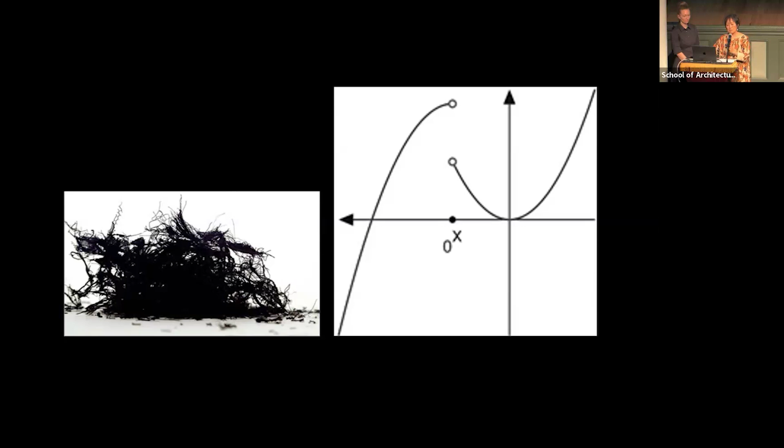I think one of the things I realized over time was that life can be very complex, and one of the great skills is learning not to go in a straight line. The idea of tangents and accepting a condition, in many ways I think is particularly true to the lives of women - that they're not straight lines, not a single focus that ends in a perfect circle, but instead a kind of exploded material from that circle. You learn not by accepting the complexities, but by learning how to flow around them, flow with them. And I think that's a great strength we bring as women to the practice.

I want to start by saying I'm very happy to be here, standing next to Billie, who I've worked for and with for the last 8 years, and very happy to be speaking with you. So thank you.

This is me as a child. I grew up in a place called Grayslake, Illinois, about 45 minutes north of Chicago, and that proximity would be really formative. It's where my love of architecture started. For me, it was the glittering beauty of the city at night, and more specifically, the idea of living in an apartment, which was the height of glamour.

From a young age, I would cut floor plans out of the Chicago Tribune of condos, and I would draw my own. They were always 3 bedrooms - one for me, one for my brother, one for my parents. And they took up the entire rectangle of the piece of paper because it was completely interior. I was only thinking about looking out through the windows at the beautiful city.

The other exciting thing about cities for me was the idea that so many different lives could be collapsed on top of each other, but also separate. You could have your own little world, but you could see and have access to other worlds.

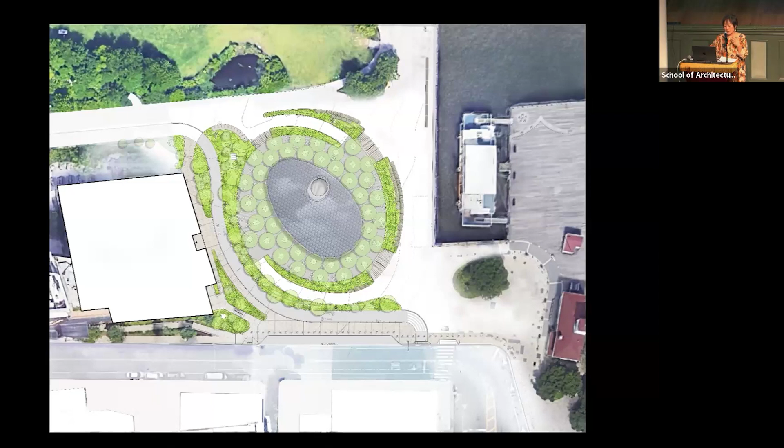And then Michael planted—this is his drawing—ginkgo and honey locust trees all around it, so the coloration around the trees right now, and in the fall, will all be golden. So you can see it's a very, very simple plan.

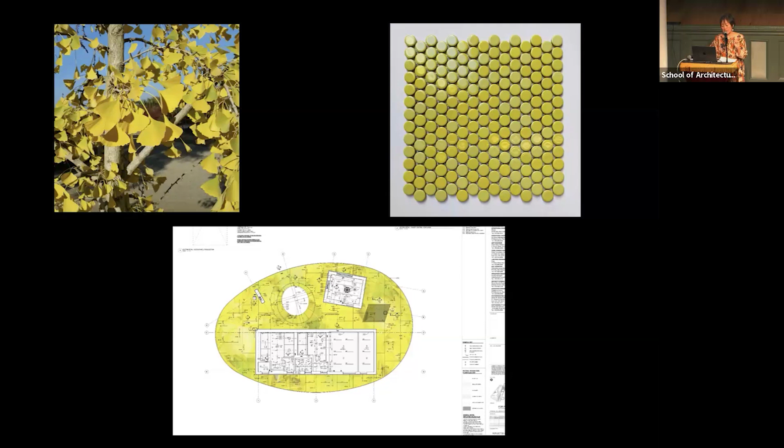It's three pieces: there's the concession stand, the bathrooms, and then a column, because holding it up is a very large canopy. We took the canopy color from the ginkgo trees surrounding the pavilion, and are using these small penny tiles of slightly varied colors of yellow for tiling the underside.

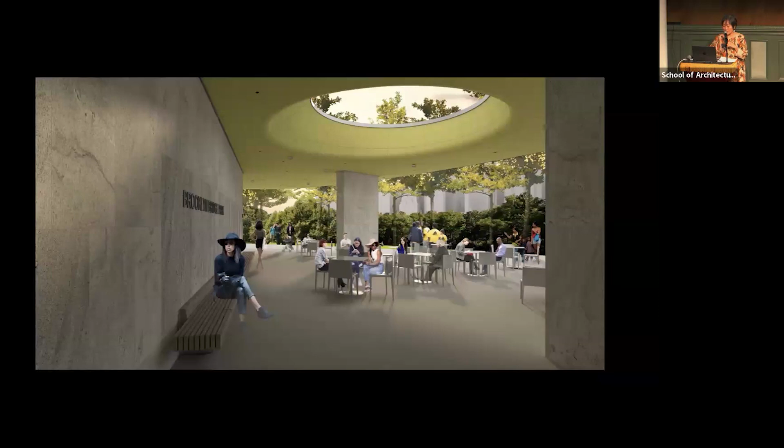This should be done, I think, in about another two or three months. And this is the office out for a trip to look at the framing and the beginning of the tiling of the underside of the canopy.

This was a project finished at the New York Philharmonic Lincoln Center, and we were involved with doing all of the public spaces. So all of the lobbies, all the places where people went became the spaces where we did our work.

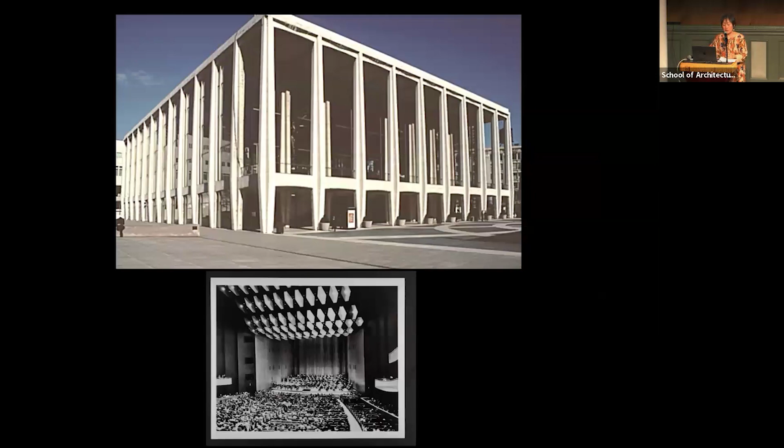That sense of a unidimensional material, unidimensional culture created spaces that in our own lives today felt very cold and unwelcoming. So it was our task to try to make these places feel as if they could be places where more different kinds of people could feel welcome. But there is a very strong sense of formality in Lincoln Center, and it was very hard to subvert that sense of formality. But the new leadership felt it was very important.

This was in the summer of 2021. An artist named Mimi Lien did this piece where she took AstroTurf and created a whole new topography out of the courtyard of Lincoln Center. So it was with this kind of spirit that we were asked to reimagine what Lincoln Center might be.

The idea of glamour rather than the sense of sobriety, which I think the earlier Lincoln Center exuded, was very, very important.

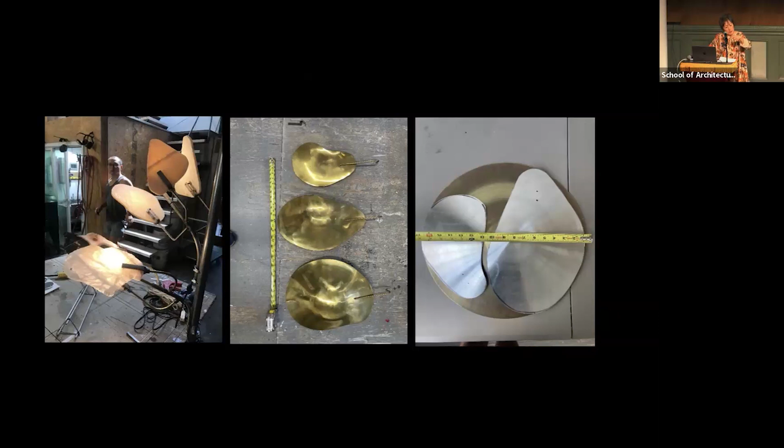They tried a number of different techniques. They tried alabaster, but it was too heavy and too fragile. Then they tried hammered brass, but it was too expensive and too heavy. So finally they ended up going to a company that makes musical cymbals, using spun metal that's much lighter. By cutting irregular shapes from the actual cymbals, they were able to make these folded, softly curved planes that became the petals reflecting the light.

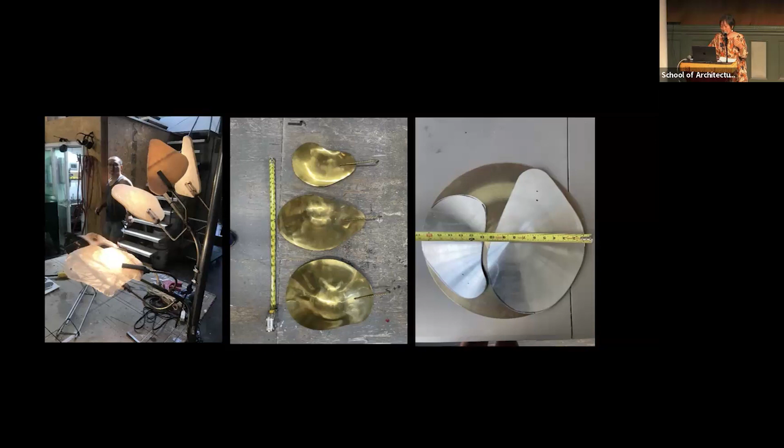Walking through the doors into the performance space, we also designed all of the fabric. It's in four different scales of petals, large to quite small, with a dark blue background. They replicate the idea of falling petals, so they're the most red and full of petals in the back, and as they move towards the front of the stage, they become bluer.

This is the next to last project before Jennifer takes over with the Obama Center. It's under construction in Mexico City. I think it will be done in a year, but we're not exactly sure — I'd say 2025.

Mexico City is an incredible city, very large, very spread over, and it feels almost impenetrable. But if you look at an aerial view, you see it's punctuated by interior courtyards. So one of the things we wanted to do with our project was make it feel connected to the architecture and culture of Mexico and Mexico City.

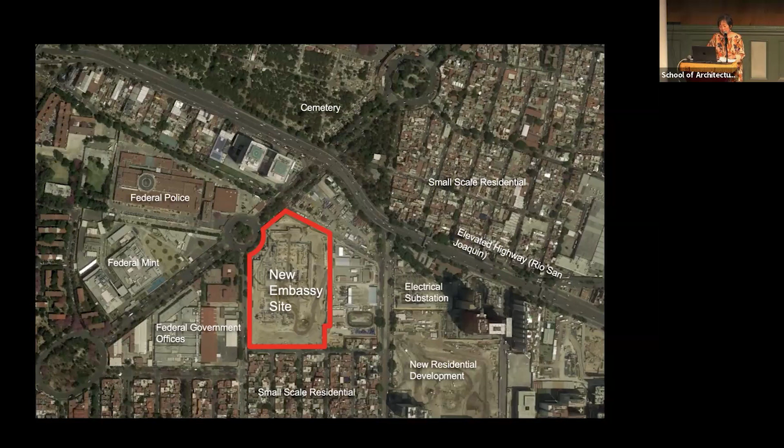Our site was in an area called Nuevo Polanco. It's an area that's growing, with a number of museums nearby, including one by David Chipperfield very close by. It's an irregularly shaped site, and the building is very, very large.

Mexico is the second largest trading partner of the United States, so it's one of the busiest embassies in the world. It's one million square feet, so it was really huge.

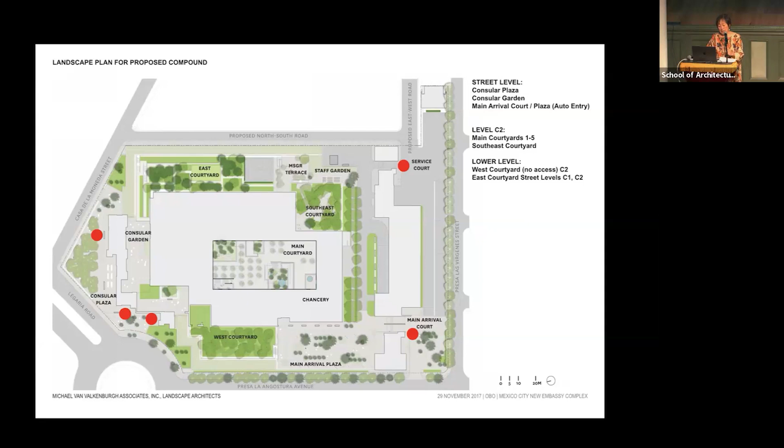But it is surrounded by a very intense landscape and a series of courtyards. The courtyard you first see in red is the primary courtyard, at a piano nobile, an upper level. Then there are a series of courtyards within that courtyard, and more at grade. So it's a very punctuated building.

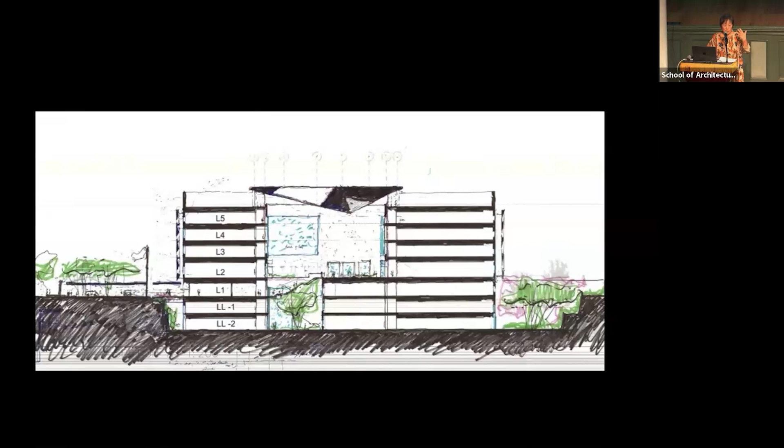Because the sun is so high in Mexico City and so intense, the main courtyard also has a sculpted roof over it, which brings in light and allows rain to come in, since there are plants underneath. We did a number of studies looking at how light would come in.

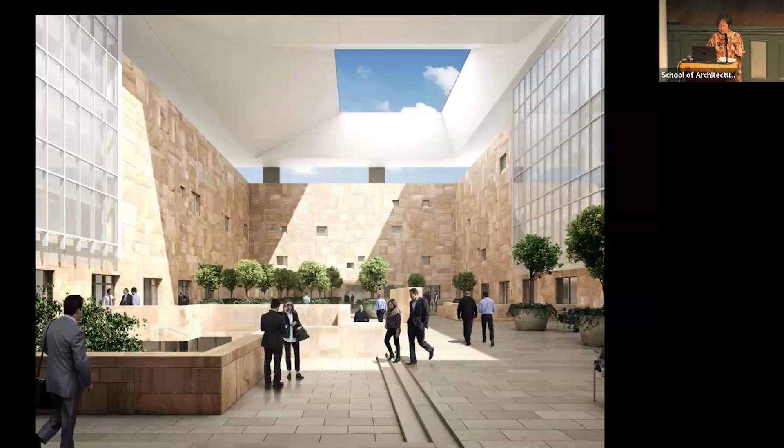This is a rendering of the courtyard. It's the primary gathering space for all the people who work there, allowing them an outdoor space that is extremely protected, but it will also become a public space when various events happen at the embassy.

So we used a kind of sandstone — first looking at travertine, but then eventually going with sandstone because it's a color akin to the warmth of the yellows and reds you see in Mexico City.

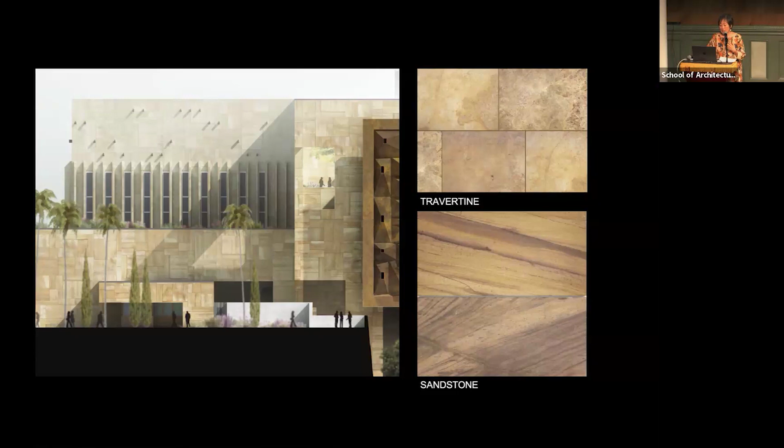And the building is, I think at this point, mostly clad. There's a very powerful, very intense art program here.

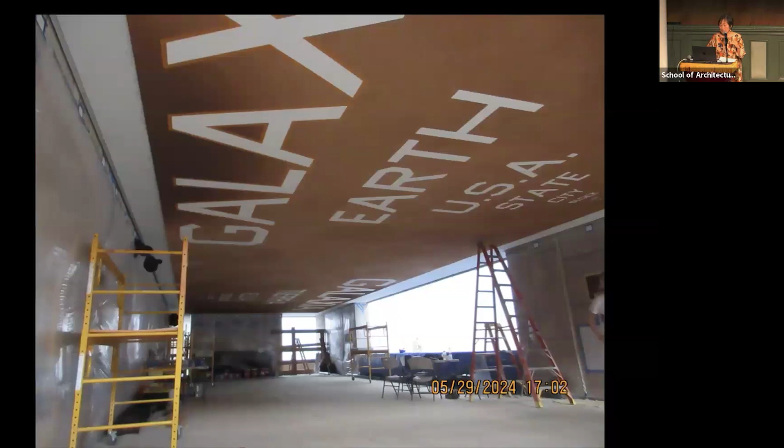This is the entry for Mexican nationals coming in to get visas. This is a piece by Ed Ruscha, where he starts from a galaxy, and I think the last word is 'dot.'

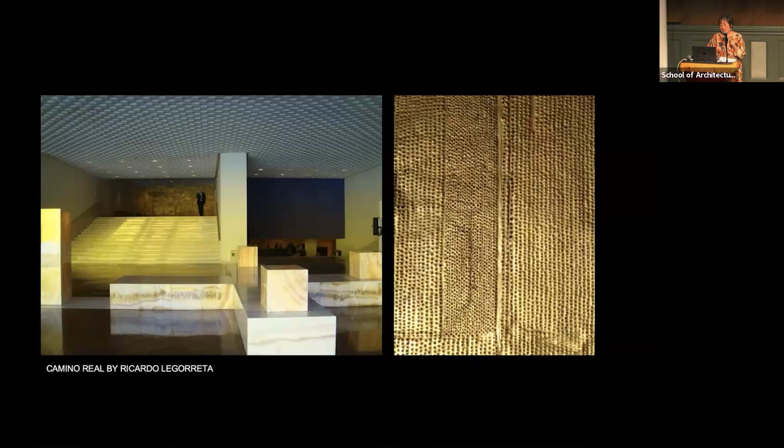We were very interested in the artwork we saw in the hotel by Legorreta, and there's a lot of traditional Mexican metalwork, which involves shaping and making these sort of pinholes.

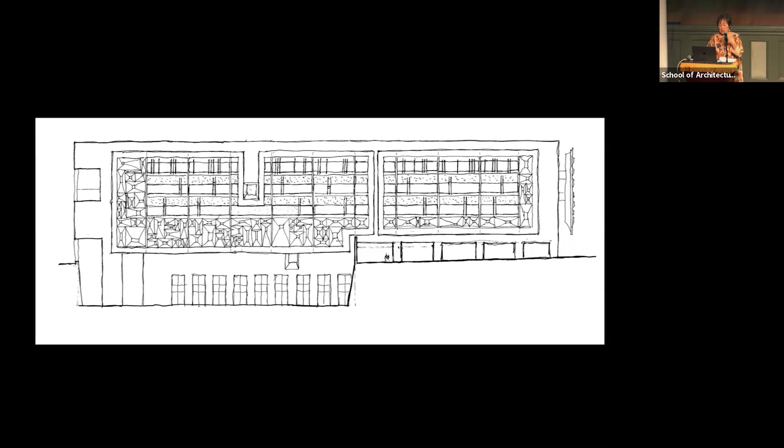We decided to add a screen, because this is essentially a very boring building — it's all offices and all the windows are the same. So to give character to the facade and also act as a sunscreen, we designed this rather complicated sunscreen made out of bent and cast metal. It's all cartridge bronze.

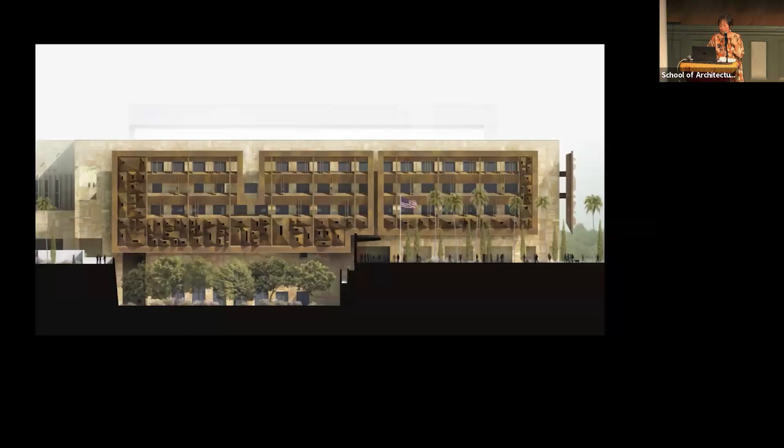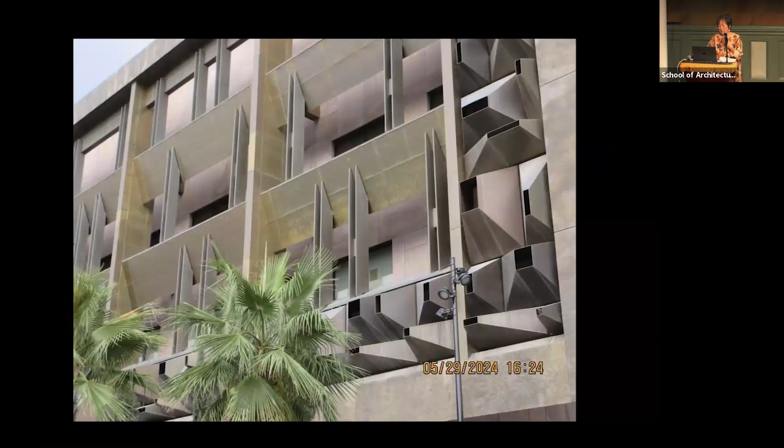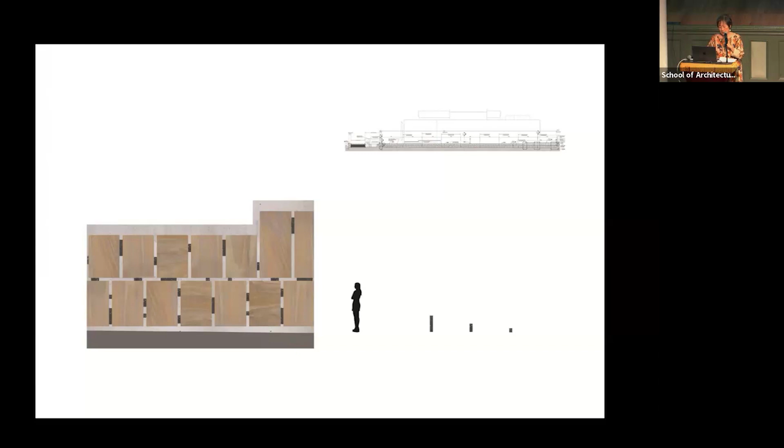There's also a very, very big wall that runs around all embassies, but we just didn't want to make it a plain wall. So we started to look at Mexican textiles and made it out of concrete with small black panels in it, and then large pieces of sandstone, so it becomes much more of a tapestry than a solid wall.

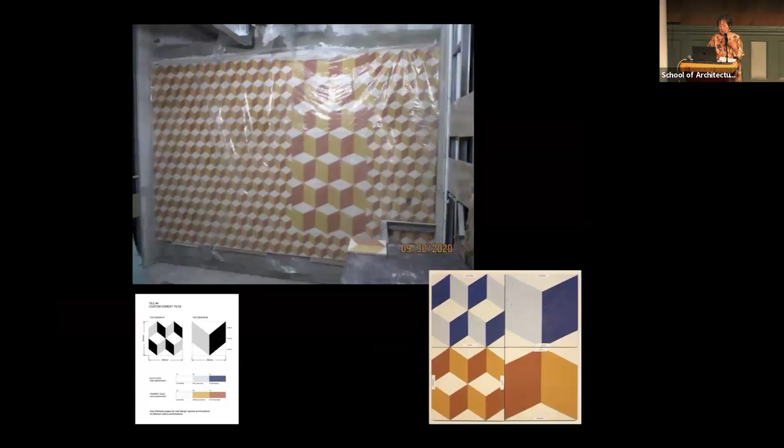We looked at the tile in Mexico because there's incredibly beautiful tile, and then used very common cement tile in all of the bathrooms in these different patterns.

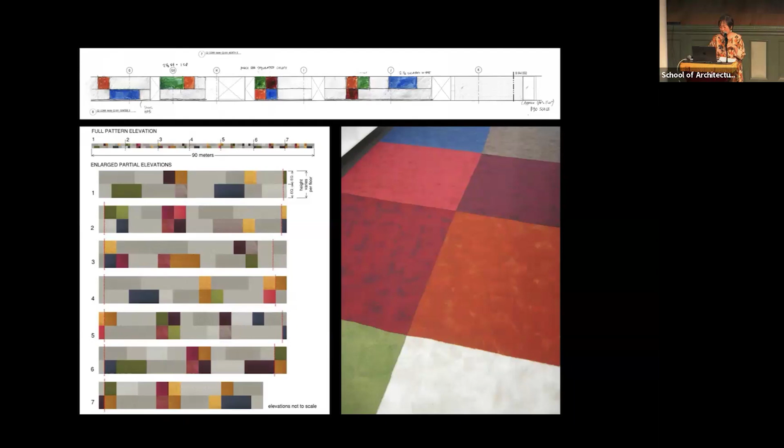And then finally, we took some of the embroidery and translated it into mosaic tiles for some of the dining areas. So that's still underway. Hopefully it will come forward soon.

I'm just going to give a brief introduction to the Obama Center before I turn it over to Jennifer, and I would have to say that 2025 might be 2026.

It was a competition, and I think one of the things that we did in our competition was probably think less about the building and more about the meaning of a building. And the first question was, can a building represent a vision?

Often we use words to help us stay close to our original ideas, and the two words we came up with were ennoble and enable. We felt that the inauguration of President Obama was an ennobling moment for the nation. But we also felt that what he really wanted to do with this presidential center, which is what he's dedicated his life to doing, is to enable other people.

So beyond the sense of just standard storytelling, which is what traditional presidential libraries do, we also believed that it was very much about story making.

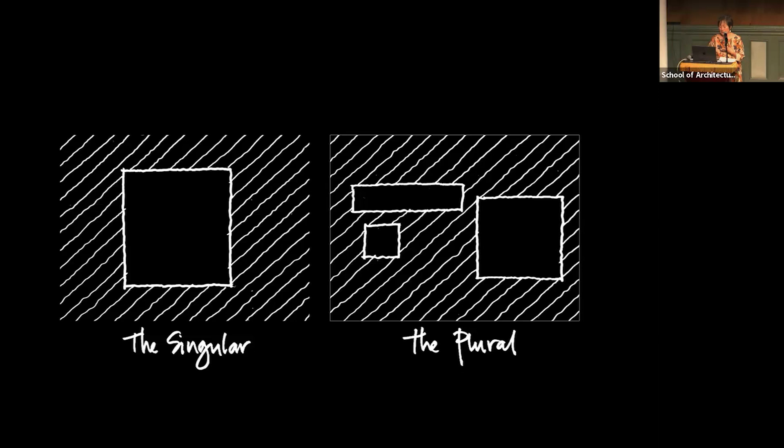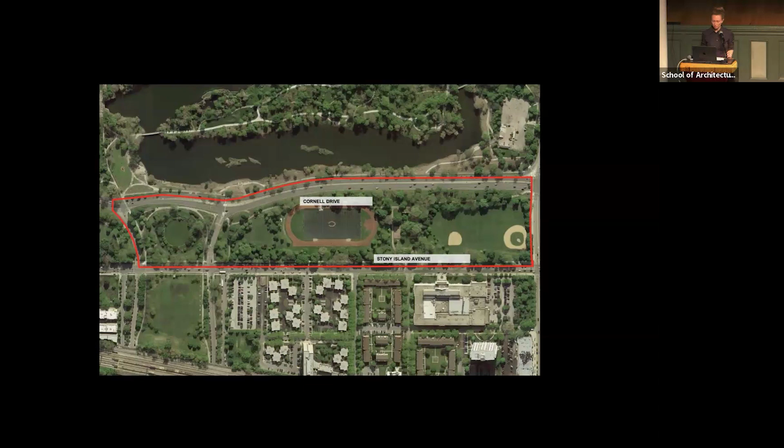So one of the first things we did was close that roadway to knit back together the park. The goal was more park, fewer barriers. Olmsted, I forgot to mention, designed Jackson Park, and one of his ideas was that the park was a democratic institution, meant to have a lot of activities. We wanted the same thing, and we did that by embedding the project infrastructure into a topography that could support new activities.

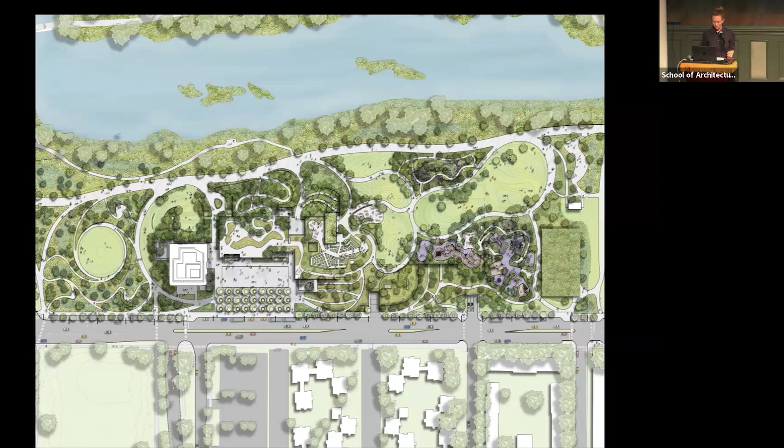So this is the 19 acres. There's a lot of parkland: a production garden, a sledding hill, a playground, to name a few. The park comes up over the tops of all the buildings, except for the tower, which is the white square there on the left. The site also contains about 200 geothermal wells. This is a net zero project and LEED Platinum.

At the heart of the campus, where the architecture really reveals itself from under the landscape, is a plaza, a public plaza. That's the entry point to the site, facing the community. There are three buildings around that plaza.

To the right is a library, a lending library, a branch of the Chicago Public Library, on the roof of which is a fruit and vegetable garden and a teaching kitchen.

The forum in the center of the image will be home to the Obama Foundation offices, and it's also public. This is a public building. There will be an auditorium, classrooms. So all the programming of the Obama Foundation will take place there.

To the left is the Tower building, which houses the museum, which will describe the life and life's work of President Obama. The idea is that this is not an insular campus, but it connects to the community through programming.

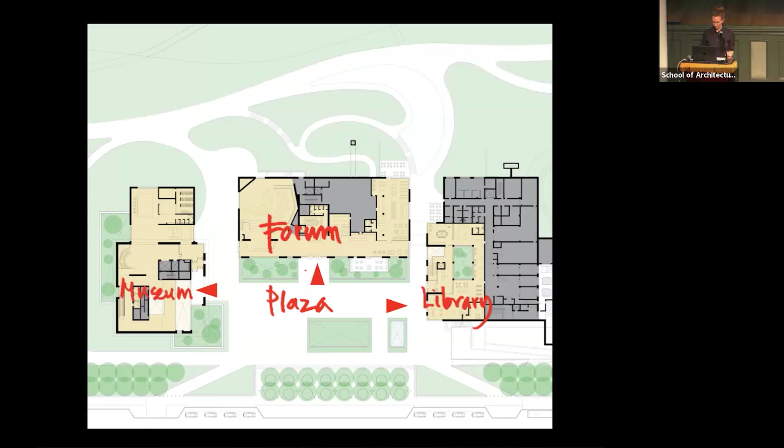This is the lower level. So all three buildings go underground and are connected underneath the plaza. Landscape courtyards bring down light to the lower level.

The tower anchors the south end of the plaza. It rises about 12 stories above the ground, and it's a structural concrete building. Concrete walls slope out at the bottom, in at the top, and they're basically held together by slabs that connect to concrete cores and act as diaphragms.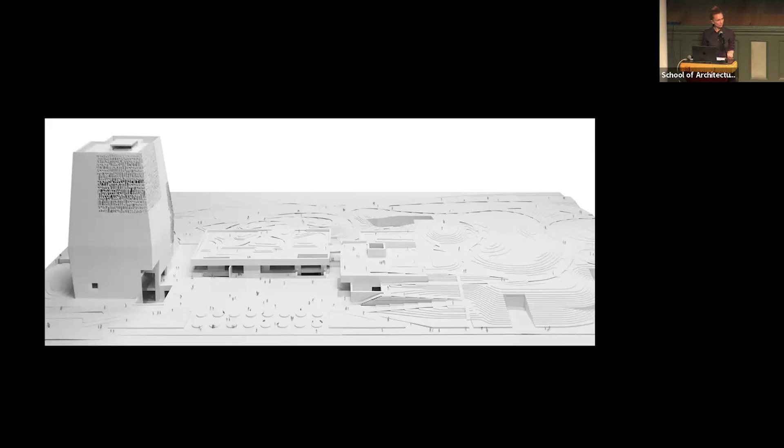So I'll focus mainly on the tower for the rest of this talk.

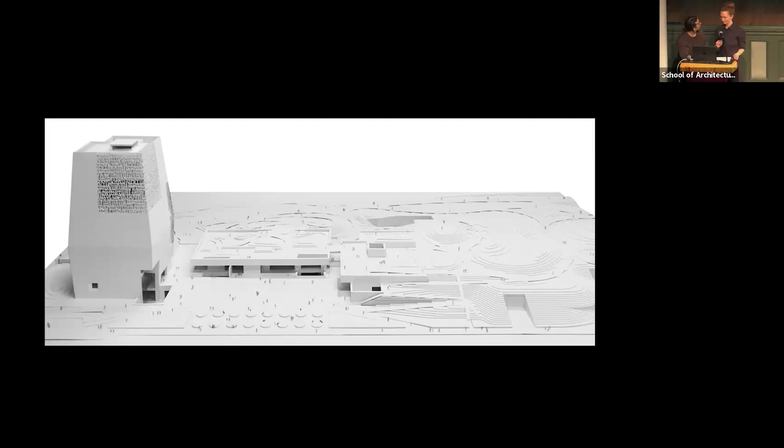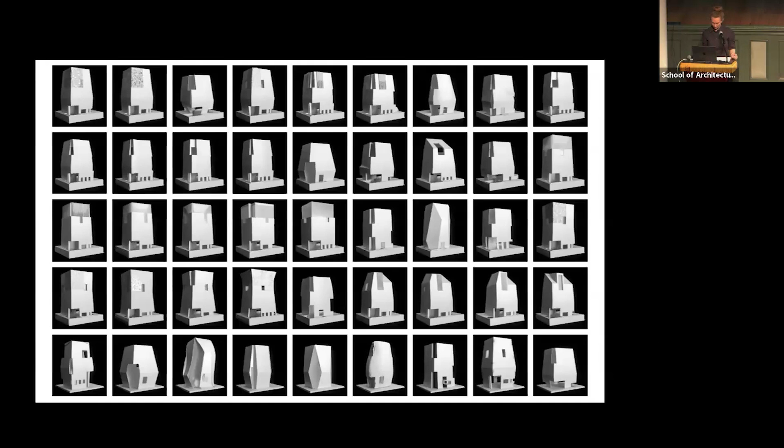Our process of design is iterative. These early study models explored how the form of the tower and the articulation of the facade could get at those early competition ideas that we had, that of a beacon, hands coming together. But we wanted a form that would be strong and monolithic.

At the beginning of the design process, President Obama asked that the building be more iconic. He wanted not only a civic center for the south side of Chicago, but a landmark that would let that community have visibility, as separate from the majority of the tall buildings in Chicago. He was very engaged in that particular phase of the project.

So how can the surface of the tower reveal itself to be deep and varied, like stone that's carved into, but also retain that elemental quality and strong form?

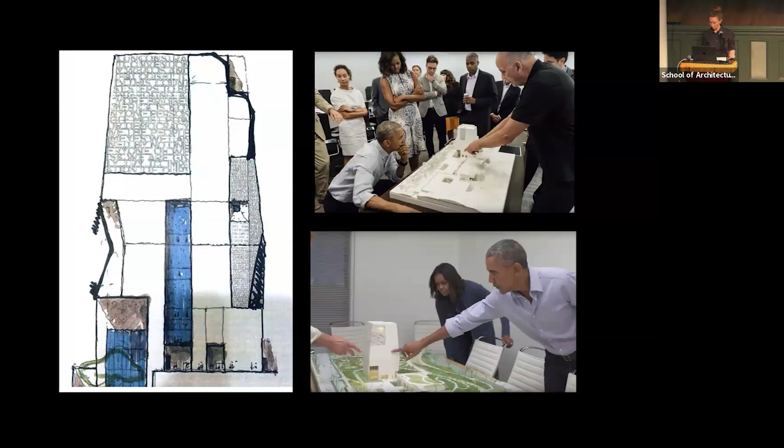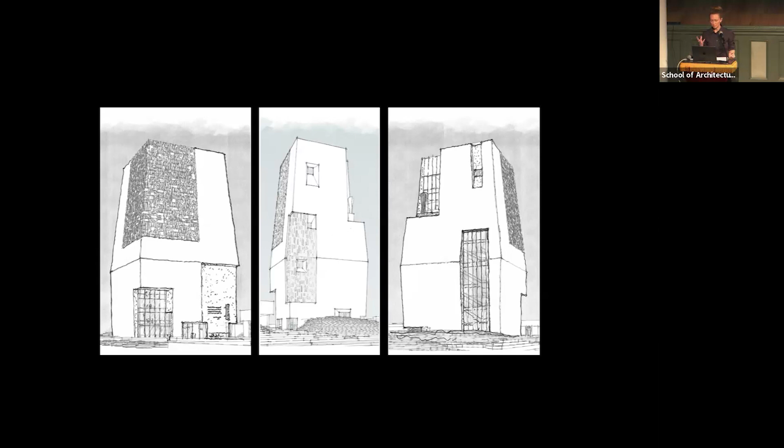These sketches show different zones of articulation. There's areas of texture, areas of porosity, moments of carving or excavation out of the mass, and areas of glazing or transparency. So we were always considering the part relative to the whole, each of the elements balanced compositionally as you move around the tower.

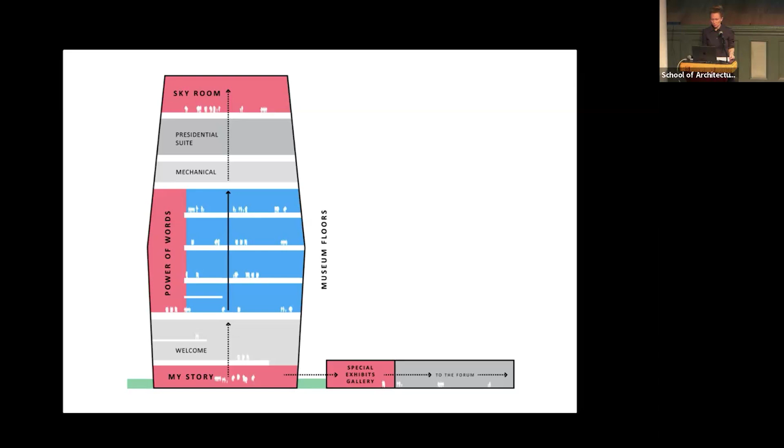So the program is informing how we can introduce openings into the tower. The top and bottom floors are where we have the most transparency, and those are the public floors. The other thing is that we had to consider blast requirements. There was extra security provisions for a building like this.

So all of those things really had us conceive of this as a solid, something solid. But that solidity was practical. At the same time, it was also about meaning. This is representing a president, but also an institution.

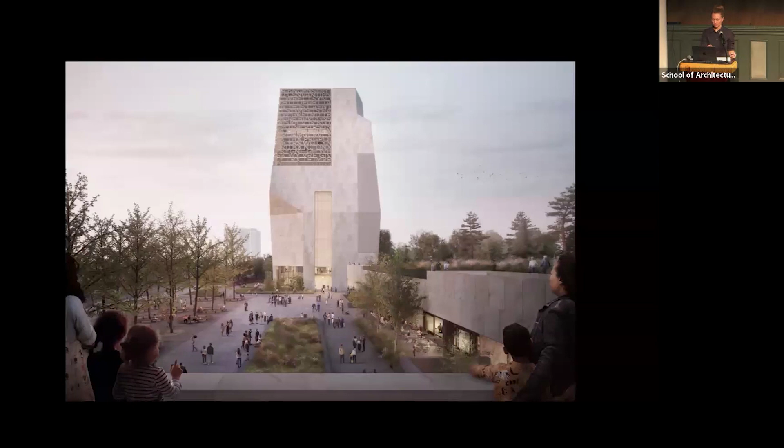It's about history. The tower is embedded in a park. It's built down into the ground. It's designed for permanence. So as you can see in this rendering, openings were carved out strategically where they were needed on the interior, and the majority of those clear glazing systems are at the top and bottom.

It was also unique in that there's sort of two stones that exist on top of each other in this quarry. Tapestry has the larger figuration and veining, and then there's a quieter, more recessive stone that also exists.

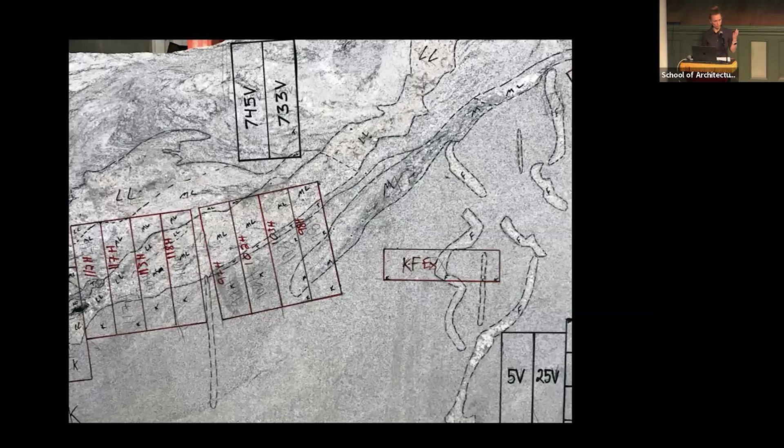There's a lot of high wind loads in this building since the tower is very close to Lake Michigan. So this is a mock-up. The tapestry is on the left, and the kittledge, which is the recessive stone, is on the right. The tower is going to be clad in the tapestry—it's more expressive, more iconic. The other buildings are going to be clad in kittledge, which is more recessive, more in keeping with the landscape that comes up over the top of those buildings.

We wanted the facade to have parts that were polished, like the previous image, but we also wanted parts that would be rough, texture that would be visible at a distance. These are some precedents we looked at early on. We knew the tower needed to be a monument, but also a building you inhabit, and texture can help break down the scale of that facade and form. It had to have a relationship to the park, to the plaza, to a person, to a hand that's going to touch the wall. As other work in this lecture has evidenced, our studio often looks for materials to show their natural irregularity or highlight imperfections that happen during a material process.

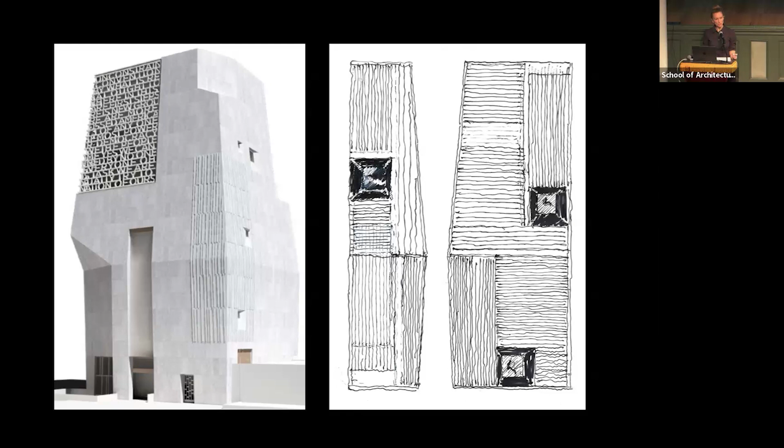I'll talk about two places on the tower where we explored that texture. The first, on the right corner in the foreground, is an area we're calling the bas relief. It began as an idea of markings on the surface, kind of like furrows in a farm field. We explored a lot of ways to achieve that from the stone we were using—looking at the edge of cut blocks, the quarry skins, the cut-off pieces that have drill marks and saw cuts, and different processes: machine cutting, blade chopping like how you make curbs, hand splitting. We wanted something that would feel like the remnant of a process.

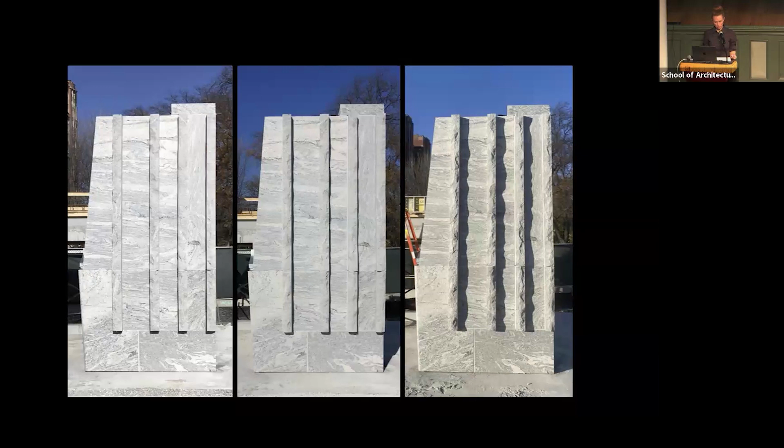Ultimately, these became bars of stone that are epoxy doweled onto our large stone panels. We wanted a texture that would also catch the sunlight in different ways and would change as the sun moves across the building, which you can see in these images. We were able to achieve that.

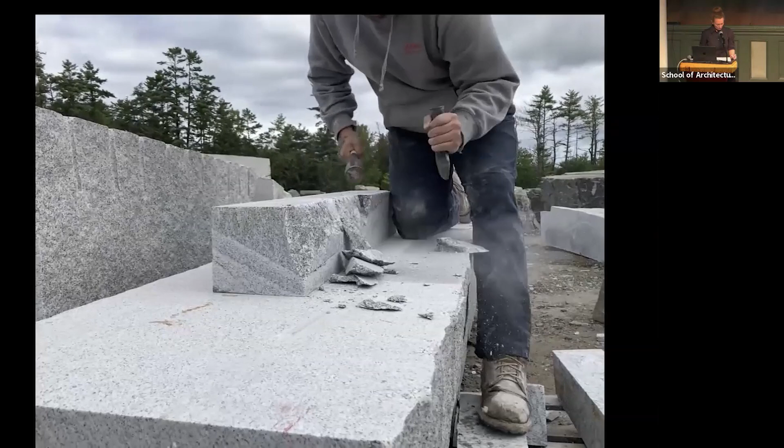This is another mock-up we did in advance. In the end, these were actually done by hand, and that was, to our surprise, the most cost-effective way to do this. Here's how it works: there's a line drawn along one side, and somebody breaks the stone along that line with a chisel. Then he turns it over and does the process in the opposite direction on the other side. So you get that uneven edge, and it basically takes about half an hour for each of these bars.

Here it is on the building a few weeks ago.

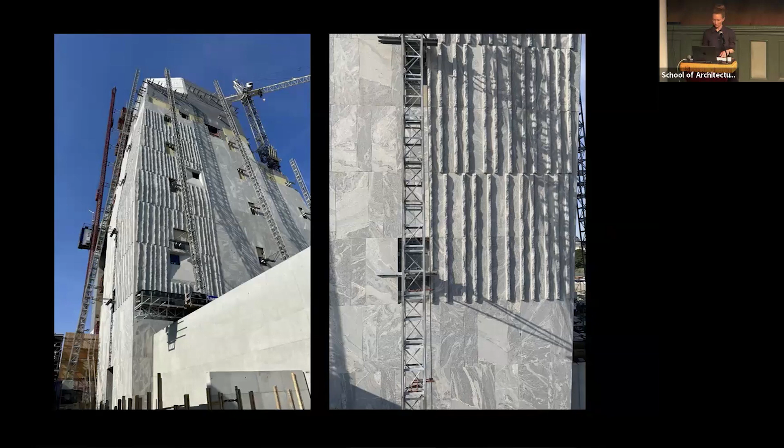The last part of the tower I'm going to talk about is the upper corner, which we call the screen. This also came from another way of thinking about how we could carve into the facade, maintain that form, but also lighten the solidity and excavate material out of that corner. The envelope of the building actually steps back behind this wall, which allowed us more freedom for this to be a structural element. We didn't have thermal requirements to think about, though it does provide sunshade.

The facade behind it is the facade of one of the most prominent public spaces of the tower, which we call the sky room. It has expansive windows to the south and west, so it gets a lot of direct sun. The screen helped us mitigate that.

Initially, this collage shows it was conceived as an abstract pattern based on text that was cut up and reconfigured, similar to ancient marks in stone like cuneiform—we were looking at text. Ultimately, the president and the rest of the team saw the opportunity to use actual words, something that would have real meaning. So these words became an abridged version of the speech Obama gave on the 50th anniversary of the Selma March.

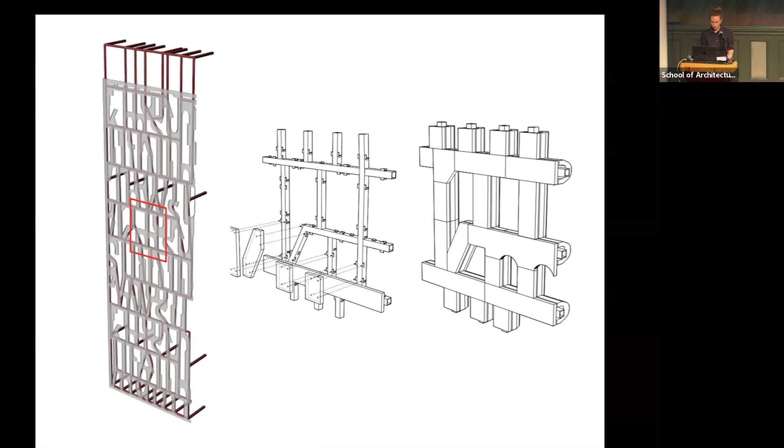So we had that idea, and then we had to figure out how to build it. The first idea was to use stone, like the rest of the building, but you can see this meant sort of an armature to support the stone, and that was not really the sculptural quality we were looking for. So ultimately we used ultra high performance concrete, or UHPC, which has stainless steel fibers, and allowed the form and structure to be one and the same.

So this is a profile of basically one of the letter strokes, and we were thinking about it on a number of scales. The legibility of the text changes depending on whether you're inside or outside the building. This is an early study of what it feels like from the inside, where sometimes you're 6 feet away from the letters. Obviously, the letters are reversed and they're large so that you can't really read a phrase. It's more abstract, and we wanted this side to feel more like a beautiful sculptural element, something polished. And the curvature also allows interesting things to happen with light across the surface.

This is a close-up shot of that inside face. The tapered side of the profile faces the interior, so the larger face faces the exterior, and that's also the top of the mold for the UHPC. So as it cures, bubbles rise to the surface and you get a rougher texture, which if this is 130 feet off the ground, it can handle.

And you can't necessarily read the text or the speech as a whole, but you see phrases, you see words. It wraps the corner, so it would be difficult to find a vantage point where you can read the whole speech.

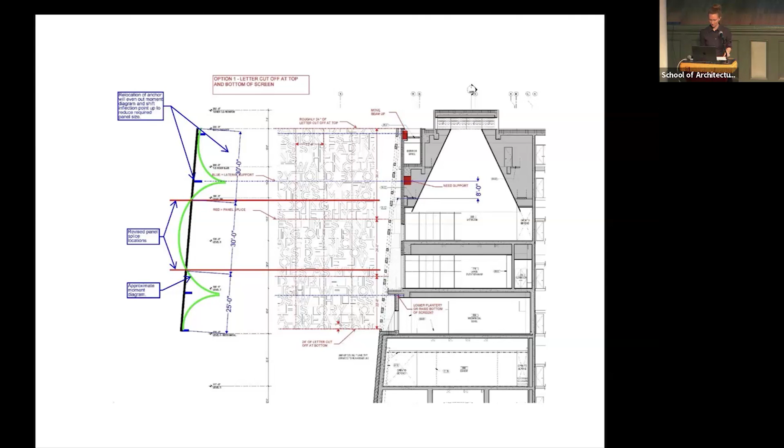So stepping back again to how this evolved from a graphic, which doesn't have to support itself, to something physical, we needed a way to connect the letters. And Pentagram gave us this idea, which has precedent in typography, which is of ligatures, where two letters share a stroke. So you can see with those A's on the left, we basically used horizontal ligatures to connect letters. And this allowed us to have an armature to continue load paths down to the bottom, as this was all dead loaded.

We were also taking into consideration the reality of getting these panels to site. So we had to think about what could fit on a shipping bed, a truck bed, and that really defined the width of these panels because each panel needed 2 load paths. There was a lot of negotiation, going back and forth between our structural engineer, our graphic designer. We're talking about shifting letters, sometimes a couple inches, to get a load path to work, but also make sure the legibility of words, sentences was still readable.

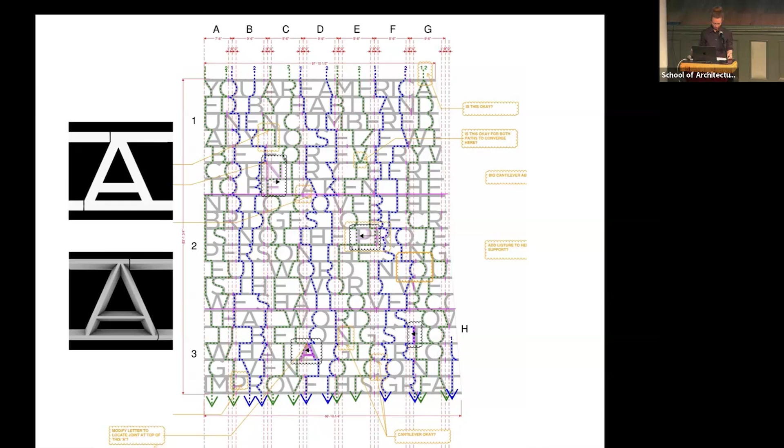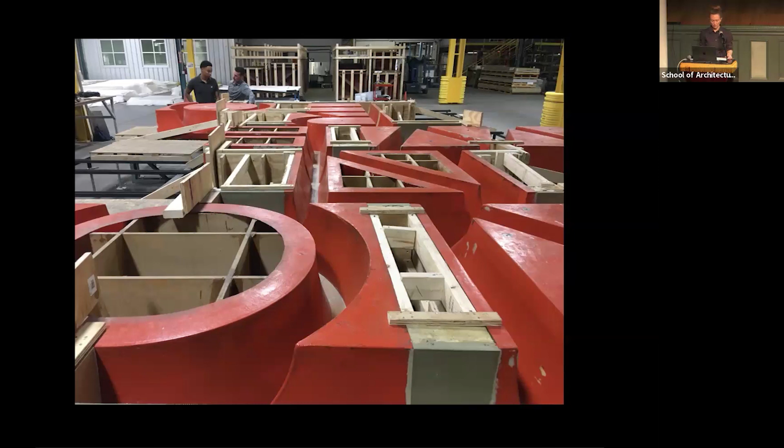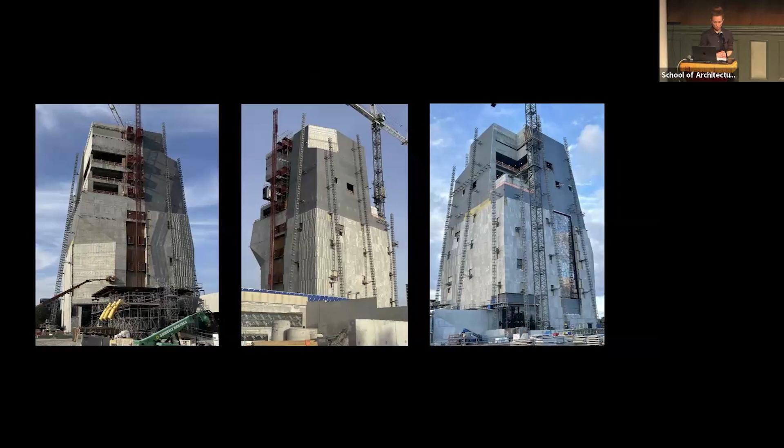And here's the tower as it is a couple weeks ago. Stone is going up quickly. And a view looking over the park towards the north to downtown Chicago. Fly over the entire project.

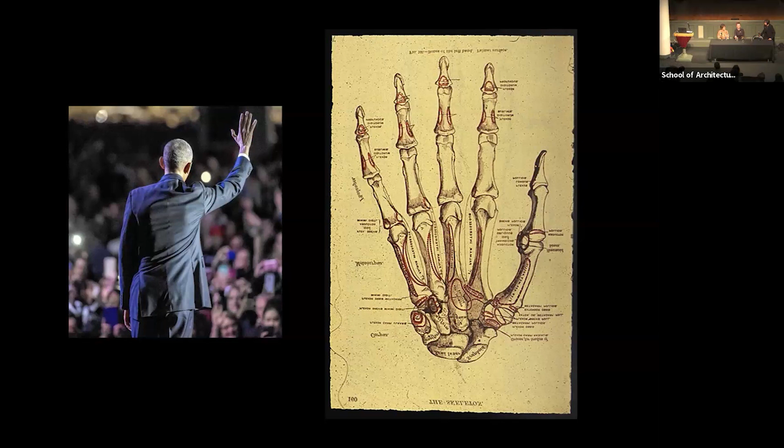It's amazing work. Thank you for a beautiful, beautiful lecture. I like the combination of Billie's part, full of histories and personal experience of life, what I call the Descent of Tsien. And taking us through this trip, although brief, apparently because they're more recent projects, but anybody who has followed the extraordinary work of Tod Williams and Billie Tsien knows what lies behind it.

And certainly Jennifer is not here for nothing. I mean, she's brought another voice, which is the voice of new action, of engaging with what's there and bringing it to fruition, which is an extraordinary thing to do for, as we all know, how hard it is to get anything done and built, and even more so, the level of work that has been presented.

I was going to actually, I made so many notes when I watched this PowerPoint, and I never write about current colleagues or contemporary architects. But as I was making notes, I was making thoughts, I said, oh, it looks like I'm writing, but of course it's not for me to speak about your work because you did it beautifully. So the hard things, you explained everything so well, but still there are many things to be talked about and maybe expand a little bit or dig into.